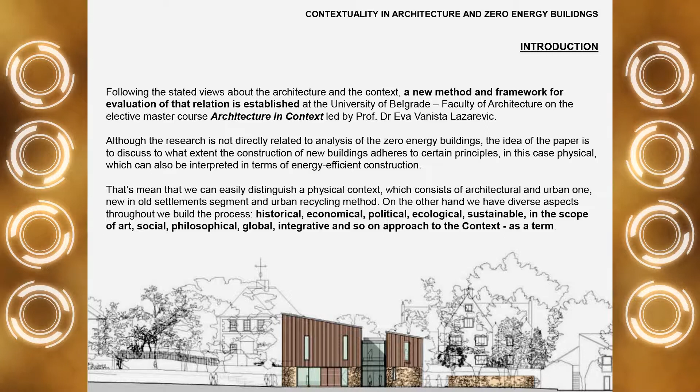For the purpose of this research, we used an evaluation procedure containing a new method and framework that includes six pairs of criteria: first, order and unity; then ratio and proportion; scale and hierarchy; symmetry and rhythm; detail and texture; and then harmony and beauty.

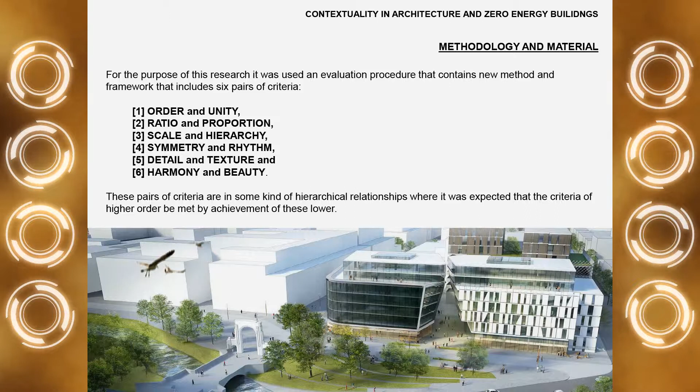These pairs of criteria are in a kind of hierarchical relationship, where it was expected that the criteria of higher order be met by the achievement of the lower ones.

Each criterion has its own indicators. Order and unity has indicators like vertical regulation, horizontal regulation, the position of the building on the plot, etc.

Then ratio and proportion has seven indicators, which include street profile, building dimensions, ratio of the buildings, etc. Scale and hierarchy had...

...indicators like building size, element size, transparency of the ground floor, transparency of the buildings, the importance of the public space where the building is situated, etc.

Then symmetry and rhythm had indicators like object distance from the axis of the street, street cross-section, character and forms of the roofs, etc.

Then details and textures has indicators like reflection, transparency, treatment of the surface, perception, distance, etc.

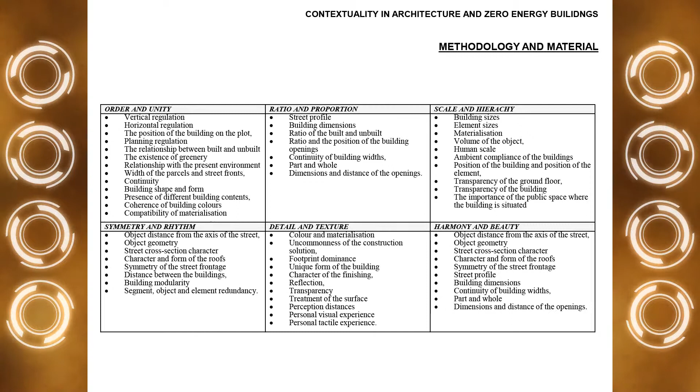And then harmony and beauty, as the highest criteria that could be developed, has 10 indicators that include object distance from the axis of the street, object geometry, street cross-section, etc.

So the presented framework is used for evaluation of new buildings built after 2000 in the territory of the city municipality of Vračar, one of the central and famous areas of the city of Belgrade.

The research was done at the University of Belgrade Faculty of Architecture with students at Master and PhD course Architecture in Context. It consisted of 2 parts that took place consecutively. The first part was realized with Master course students who had the task to carry out a detailed description of an evaluation following the criteria-based structure of the research.

For this purpose, 22 buildings constructed after 2000 on the territory were identified. Case studies were done on the basis of catalog sheets, as presented in this slide, and accordingly, for each of the 22 objects a mini catalog was made.

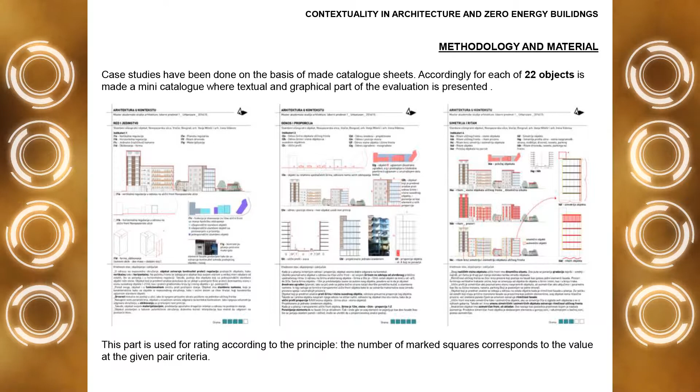On the segment of this catalog, in the down right part, this is the part used for rating, according to the principle that counts the number of marked squares corresponding to the value at a given pair of criteria.

The second phase of the research included processing the catalog of each object in order to create a synthesized overview of the results regarding the entire territory of the city municipality Vračar.

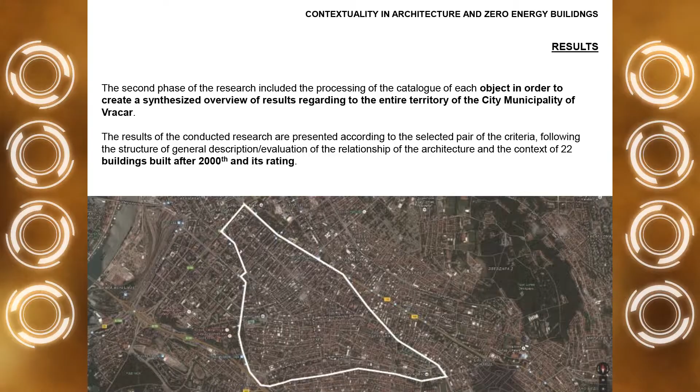The results of the conducted research are presented according to the selected pairs of criteria, following the structure of general description and evaluation of the relationship of the architecture and the context of the 22 buildings. The results include 6 segments related to the criteria.

At the first pair of criteria, order and unity, we conclude that the built structure has a large number of style units following the regulation of the surrounding structure, both horizontal and vertical adjustments. The new facilities introduce new materials, colors and textures that fit into the environment and broader context. The analyzed objects have an established relationship with buildings in the immediate neighborhood based on significance and style characteristics.

There are also objects that stand out compared to the surrounding objects, which could be explained as visual discontinuity. As the final conclusion for this criteria, among the 22 analyzed objects, most of them, 9 buildings, are rated with a score of 4. In terms of order and unity, Vračar territory is rated with an average score of 3.22.

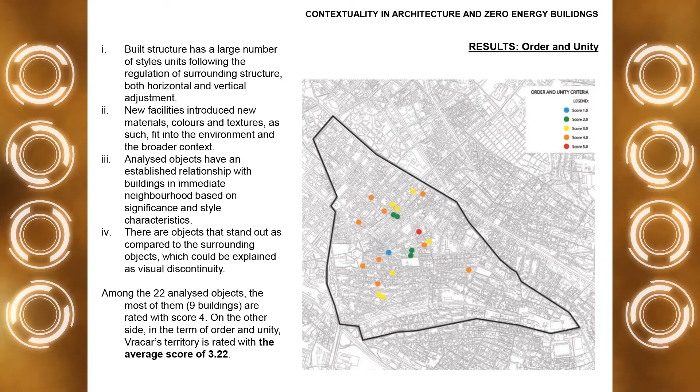In regard to ratio and proportions, the observed building structures at the territory are diversified, given that only objects in sequence and of the same type have continuity of relationship and proportions, which is not often the case with new buildings. If we look at the overall built structure, objects are aligned with the height regulation while the width of the plots changes. Modularity, observed at the adjacent buildings, is not applied to the new objects.

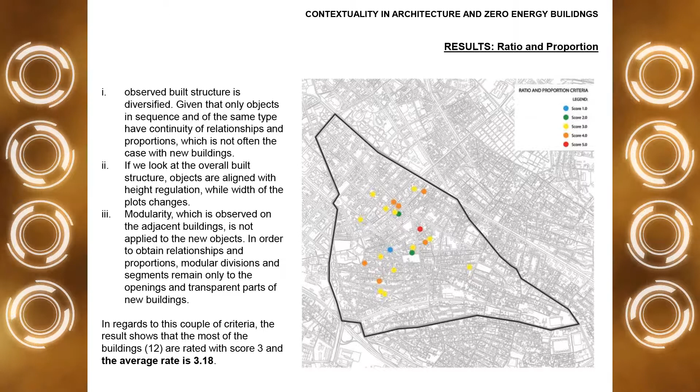In order to obtain that relationship and proportion, modular division and segments remain only in the openings and transparent parts of the new buildings. So in regard to this couple of criteria, the results show that most of the buildings are rated with a score of 3, and the average rate is 3.18.

Then, in regard to scale and hierarchy, the observed building structure represents variation in height and front, and a mismatch of old and new architecture. The main details of the facade are overemphasized in order to relieve the transparency of objects. These details also occur on new buildings that stand out from the context.

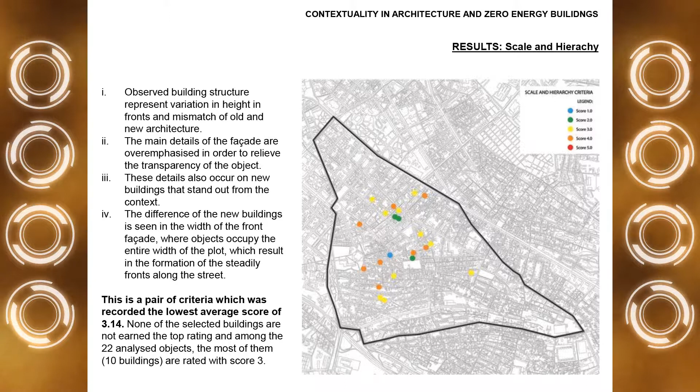The difference in new buildings is also seen in the width of the front facade, where objects occupy the entire width of the plot, resulting in the formation of steadily fronts along the street. This pair of criteria recorded the lowest average score of 3.14. None of the selected buildings earned the top rating among the 22, and most of them are rated with a score of 3.

In accordance with symmetry and rhythm, the analyzed building structure is built in an entirely asymmetrical way. Individual units have symmetry that emphasizes the main structure of the buildings, while the facade establishes a dynamic rhythm between full and empty parts of the structure. Changes in height of buildings give an authentic rhythm to the streets of Vračar, where different objects can be found not only by type but also by purpose.

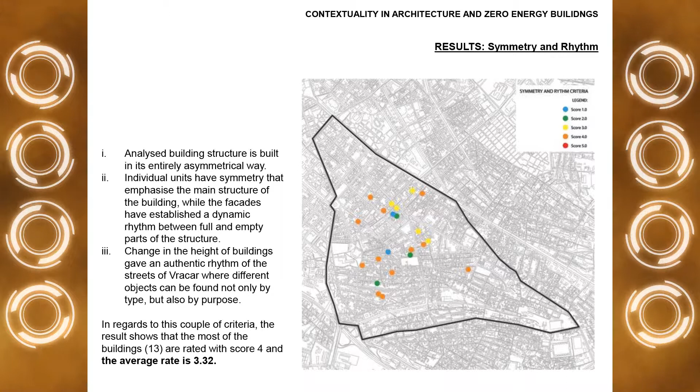In regard to these criteria, the results show that most buildings, 13, are rated with score 4, and the average rate is 3.32. Then we have detail and texture, and we conclude that there is a use of different materials and light on the facades.

In relation to this, most of the buildings, regardless of whether they are old or new, are different. This gives various opportunities to architects of upcoming facilities to highlight their projects, and details are prominent, either contrasting large surfaces and strikes, or as mosaic facade structures.

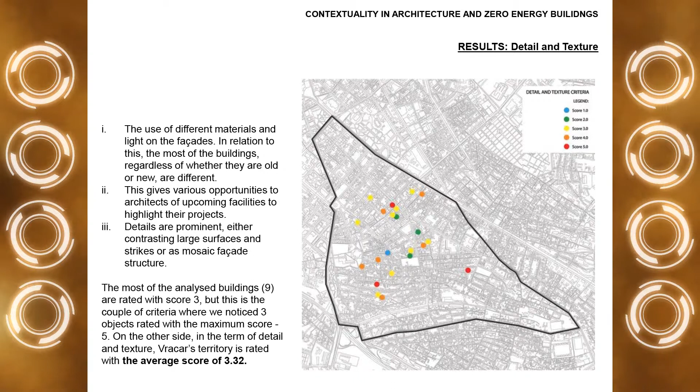Most of the buildings are rated with score 3, but a couple of criteria were noticed where 3 objects rated with a maximum score of 5. On the other side, in terms of detail and texture, Vračar territory is also rated with an average score of 3.32.

And the final couple of criteria, harmony and beauty, as the highest criteria in the domain of architecture and design, we concluded that the harmony and beauty of the buildings constructed in Vračar after 2000 is reflected in the variety, quality, finish, and the tendency to allocate each object. When these indicators are looked at in context, we see that the observed objects are only partially integrated, and that they do not follow literally all area requirements placed on the street and block level.

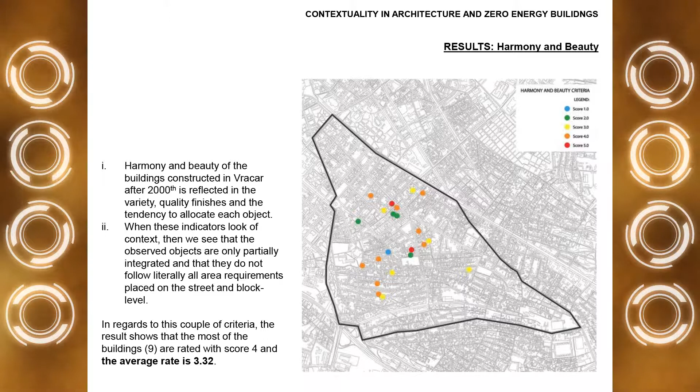In regards to this couple of criteria, results show that most buildings, 9, are rated with score 4, and the average rate is 3.32.

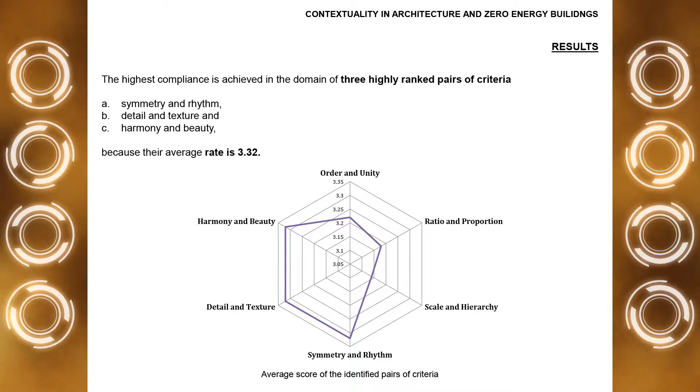As some kind of final conclusion in the domain of results, the highest compliance is achieved in the domain of 3 highly ranked pairs of criteria, which is not expected in this kind of research: symmetry and rhythm, detail and texture, and harmony and beauty, because their average rate is 3.32. But the other, first defined couple of criteria had a little bit different, smaller scores.

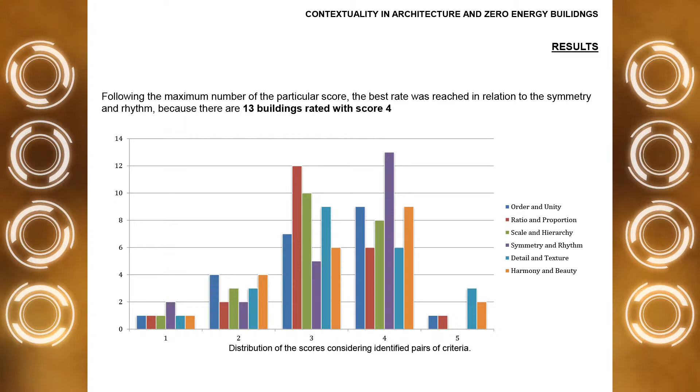If we follow the maximum number of particular scores, the best rate was reached in relation to symmetry and rhythm, because there are 13 buildings rated with score 4. We can see that here in this part.

As some kind of conclusion, as I said at the beginning, this is not directly related to energy efficiency and construction, but we can make some indirect conclusions. As we follow the results of this analysis, encompassing the buildings built after 2000 in the municipality of Vračar, we observe that there are plenty of facilities incorporated into the environment and existing lot of current physical structure, which are more or less successfully inserted into the study area. Most of the buildings are designed and built in respect to the planning regulation and recommendation.

This is the only framework that is respected, because these are just a legal set of requirements. But when we look at some soft elements like details, textures, rhythm, and hierarchy, that does not give any suggestion of some kind of legislative form that is respected in the domain that we expected.

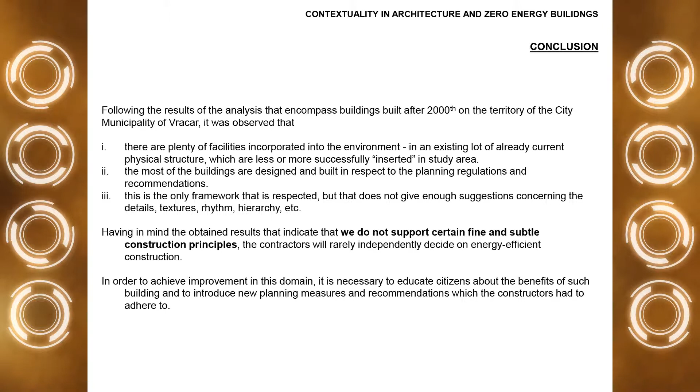Having in mind the obtained results that indicate we don't support certain fine and subtle construction principles, the contractors, we conclude that the contractors will rarely independently decide on energy efficiency construction. So in order to achieve improvement in this domain, it is necessary to educate citizens about the benefits of such building, and to introduce new planning measures and recommendations which the contractors would have to adhere to.